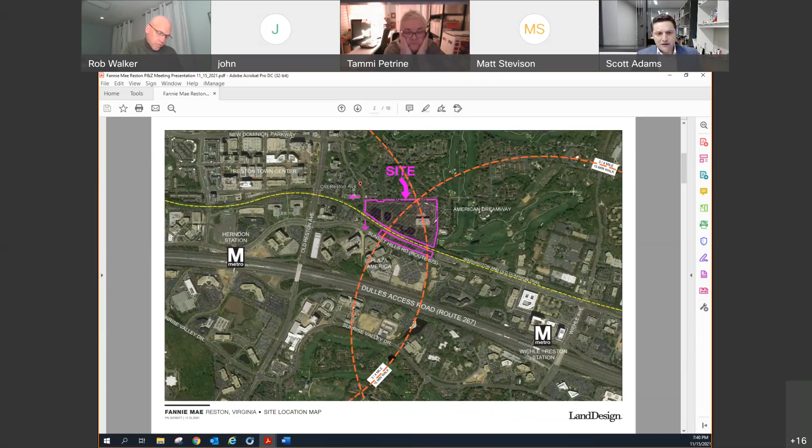The site is the old Fannie Mae property, a little over 28 acres north of Sunset Hills Road, east of Old Reston, about three-quarters of a mile from both the Wiehle-Reston Metro station and the Herndon station. The southern portion is bisected by the W&OD Trail, leaving a small sliver between the W&OD and Sunset Hills. The site is currently zoned PDC per zoning approval from the early 90s, which allowed development of 850,000 square feet of office at a 0.62 FAR, consisting of 3 office buildings. The site is currently developed with one of those buildings, with 2 unbuilt but approved office buildings totaling about 450,000 square feet of additional density.

What we're planning for this project is to utilize one of the comprehensive plan options for redevelopment of the site, which is for planned mixed use up to a 0.5 FAR. So we're retaining the existing office building, but coming in at a lower density with some residential compared to what's currently approved.

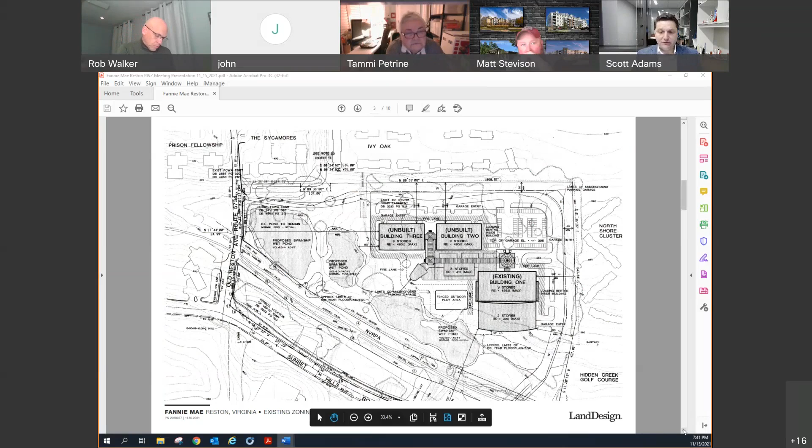Back in December, we presented a residential layout with for-sale townhomes. That layout included reshaping some of the existing ponds on the site, building public amenities south of the W&OD Trail, but with really limited public access to the site overall, plus a couple of new parking areas. There were questions raised about the design, the layout, and how land-consumptive it was, along with a desire to protect existing tree save areas and previously approved open space, and a push to make the site more publicly accessible. We also heard dislike of the new parking areas.

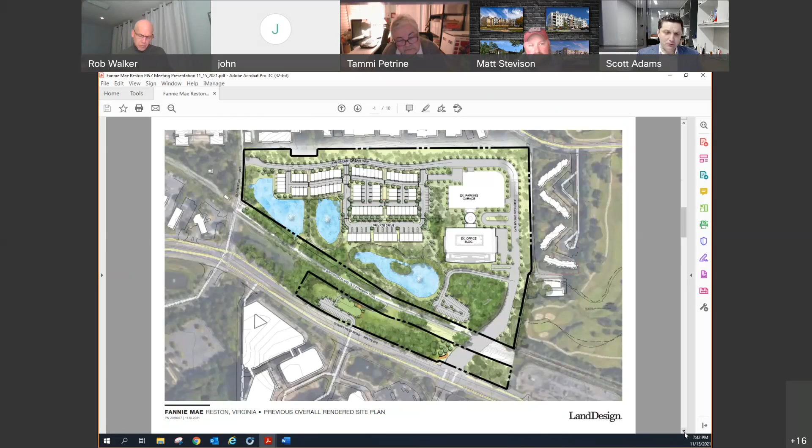The new plan we've been working on for almost the past year still calls for residential townhouses at a 0.5 FAR, a reduction of 0.12 FAR from what's currently approved, and maintains a lot of the commitments we discussed last time in terms of green building certification, the commitment to providing both ADUs and WDUs, and other standard commitments typical in townhouse projects.

But we've made a number of fairly significant positive changes to the project to respond to comments from the committee. First and foremost, we've shifted and tightened up the design so we have a much more compact layout with the townhouses, taking up less land with buildings and roads.

This has allowed us to avoid encroaching into any of the existing ponds, which will stay as currently developed on the site. There's EQC around those ponds, and we've kept all development outside of those EQC limits. The only limited work within the EQC right now relates to repairing and upgrading existing trails in those areas, and adding some new publicly accessible trails and other improvements for public use of that open space.

We're also making significant enhancements to the ponds to make them more sustainable, particularly Pond A, on the western side of the property, the left-hand side of the image, which is currently very shallow and slowly filling in. We're working to make that pond more sustainable long-term and more ecologically sound. Additionally, we're adding 30,000 square feet of EQC on the property, primarily in the lower right-hand side of the screen, north of the W&OD Trail.

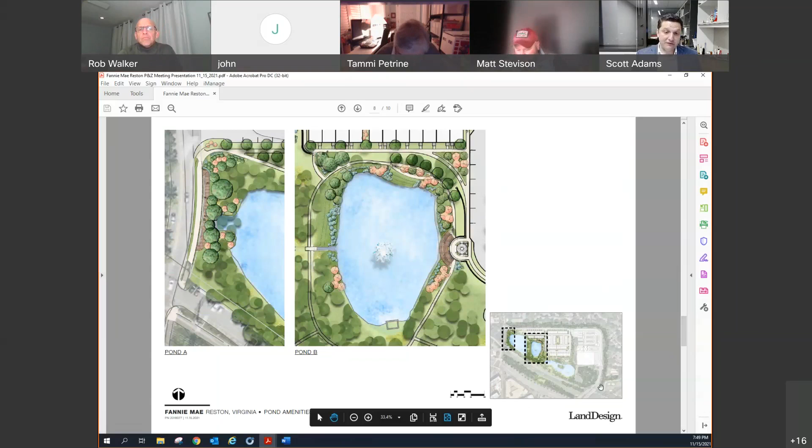From a transportation standpoint, we've continued to improve the transportation commitments as part of this project, mainly focused on multimodal transportation options. As you may recall, the residential option creates a significant trip reduction from the approved office use. For the AM peak, trips are reduced from 355 down to 45, and in the PM peak, from 376 down to 56 trips.

Additionally, moving with the theme of opening the site up more, currently American Dream Way is gated at both ends, and on Old Reston, that gate is right near the entrance to American Dream Way.

We've taken those gates and moved them back within the property so that they're only located directly adjacent to the office building. We've retained those gates mainly because we're marketing the site for secure tenants, and that's a requirement for those tenants to come into the property. But we've really tried to make sure that the entirety of the residential area is open with free access for both vehicles and pedestrians coming into the site.

Within the site, we've also improved the pedestrian connections, including the trail network, but also new sidewalks running throughout, ensuring that we've got offsite connections that allow us to be integrated into the overall Reston community. We've also committed to a number of frontage improvements along Sunset Hills. Along the entrance of American Dream Way at Sunset Hills, that's a very wide entrance right now, and we've agreed to restripe that and reduce the width of that pedestrian crossing to create a better pedestrian environment.

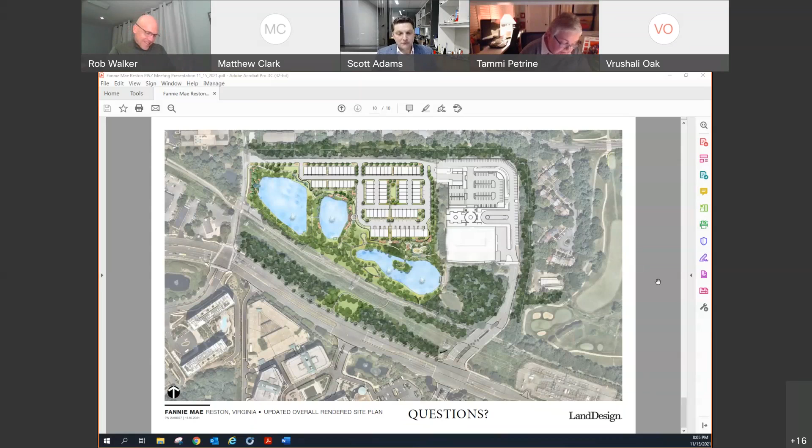Thanks, Rob. I'm glad everybody was short so I can be long. I've been looking at this. I'm in shock that there's no dog park when it's in our documents that we're supposed to be reviewing.

Why did you go from 90 units, showing 87 on your drawing, but your documents say 87 to 95? What's going on there? How is that? What is that discrepancy? It's to leave flexibility on the ultimate width of the units. Right now we're showing just a standardized unit width, but there will be variation in that as we move towards the final design, and that's where that range comes in.

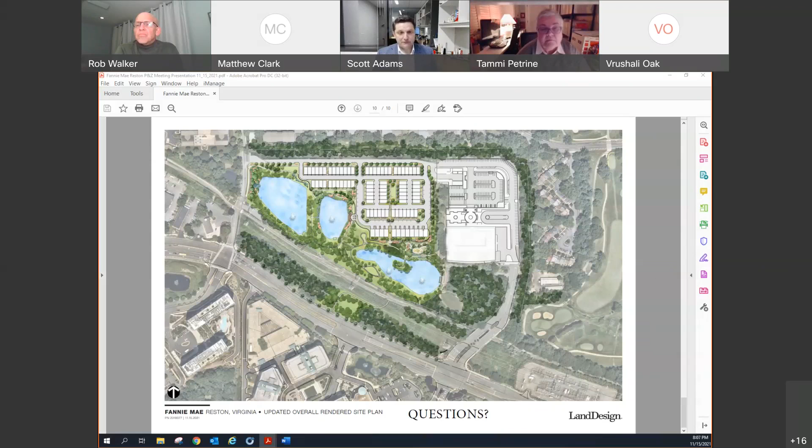Well, that's my next question. What are your width ranges, how many bedrooms, what sizes are these, and what price points? A lot of those questions depend on who the ultimate builder is for the project, in terms of the mix of number of bedrooms for each unit, and the overall mix of the final width for each of these townhouses.

I don't know, Steve, if you have any additional information. Yeah, I can weigh in on part of it. Tammi, the units, if you see the pond that's farthest to the right, those units there are 24 feet wide. And the rest of the units that you see right there are 20 feet wide.

And this plan right here, the range that Scott alluded to, because we're looking at the footprint right here. The footprint obviously won't change. The range would be 87 to 92, so it's not 95.

In terms of size, I think the builder wants to retain some optionality on whether something is 3 bedrooms or 4 bedrooms. So I kind of leave that part up to the builder, and when someone buys a house, they can choose. In terms of size, I would guess, and this is Steve guessing, the 20-foot wide units are going to be probably 2,000 to 2,200 square feet, and the larger units at the bottom would be larger, around 2,400 to 2,600 plus or minus.

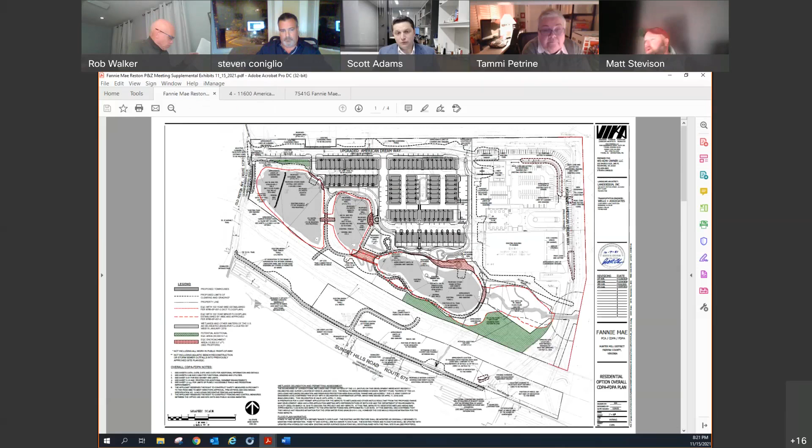There's a little bit of history with the EQC design on the site, where when the original rezoning was approved back in the early 90s, the ponds shown on that rezoning plan had a different configuration. When the site was actually built, the approved site plan shows the pond configuration that's there now. So the EQC level from the zoning plan is tied to the water surface level for those ponds. When the pond design changed, the EQC boundaries adjusted to the water surface level that was actually constructed, which means there's actually more EQC developed than what was shown on the zoning plans originally. So what we've got up here in red is the current EQC boundary for the project.

Okay, but where's the floodplain? I saw somewhere, I went on to another map, but I saw flood area right above Pond B, bordering on Pond A. I don't know the topography. We didn't get a topo map, but I assume it's higher. I don't know, I mean, I definitely saw floodplain.

And you talk about minor floodplain on your site. What I'm trying to caution you is if it's a minor floodplain, it's going to be flooded given the ferocity and the duration of these intense, very frequent storms that we're getting. So I would be interested what staff thinks about that. The last thing I think they want is for any townhouses to be built that are going to flood.

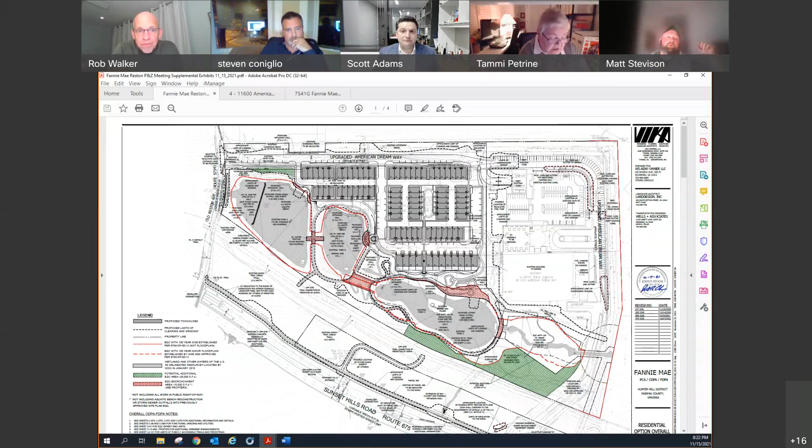Hey, can we have you wrap up your comments please? Yes, I have just a few more pages. Thank you. What, you mentioned that...

Well, first of all, has Dominion, Northern Virginia Park Authority, you're talking to them? You mentioned you had, has Dominion okayed this with their easement, the idea for the park off the W&OD?

So we have not talked to Dominion, so we would be dedicating that land area to Nova Parks, and then there are restrictions that Dominion has for any improvements that are located within their easement or within a certain distance of any of the lines that they have there. So whatever the final design of the park space is would have to respect those Dominion guidelines.

Okay, and you commented that you were going to approach RA. Is this RA for membership for the townhouses? We have... to them, sorry, go ahead. I've spoken to them, but at this point, this property is not part of RA. That's going to be a building. That is correct, that is not part of RA.

That's why I'm asking the question, because you have a statement on page 6, number 13, or I guess it's on page 7, something about RA doing maintenance. And I'm like, what? You're not even members of RA. This is not PRC. Yeah, we're not. What we have done is started having conversations with RA about the potential for the townhouse piece to become RA members, but we haven't said that these townhouses will be part of RA or that there's any maintenance obligation for RA.

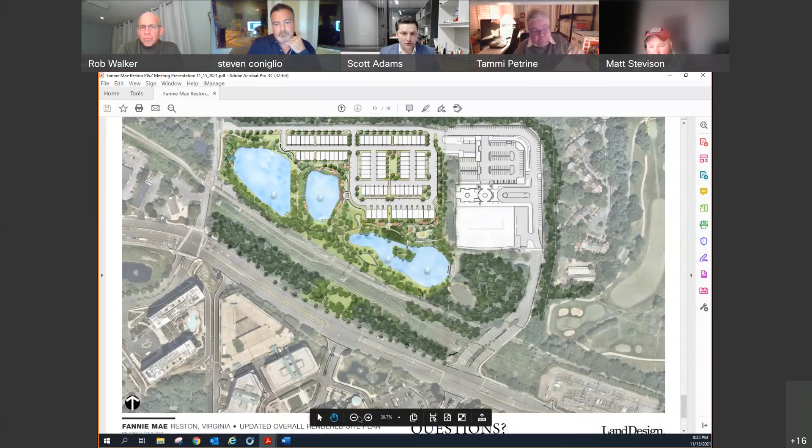Before we get off that, Scott, maybe you could tell them who we've reached out to. Sure. So we reached out to the properties that are directly adjacent to us to the north: Ivy Oak, North Shore, and the Sycamore Apartments. I see in the chat that there are folks from Charter Oak, and we're absolutely happy to reach out and invite them to the December 1st community meeting, and any other clusters that want to participate in that.

All right, can we move on to Matt?

Thank you. Yeah, I just wanted to commend the development team on the improvements they've made to the site. From the last time I looked at this, I know there were concerns I had about access points and the community open space, and I think this is a huge improvement over what I saw previously. I'll also add, as far as layouts on a site and the size of the houses and units, this feels appropriate to me for the context of the site, the density around there.

I think the parking meets the required parking count. I don't have concerns about the parking numbers. And I think the general widths you gave of 20 and 24 feet are very standardized widths that I've done all over Fairfax County in areas I'd consider comparable to this site. So I don't have any major questions. You actually answered some of the questions I had about the architecture, as far as how tall the buildings were going to be, whether they're going to have roof decks. I saw some example images in the packet, and they had that, but they were just example images.

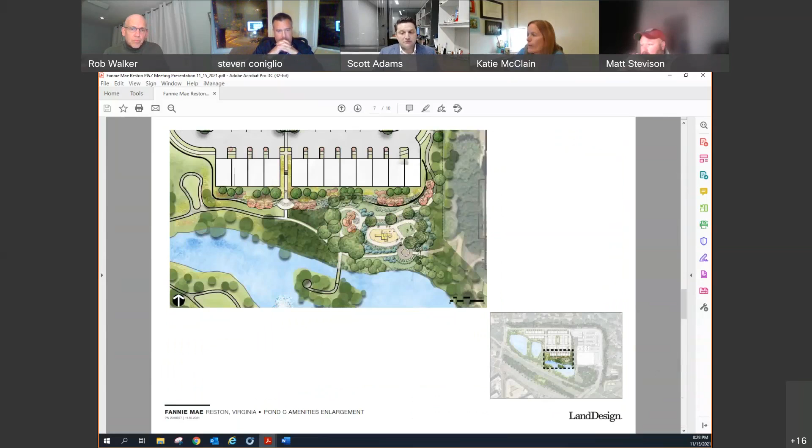So I know you said there's no more dog park. Is there still going to be a tot lot or family park up there near the townhomes? There is, right above Pond C. There's a playground planned, and also seating areas and an open grass play area. And then where the parking lot was going to be, that large parking lot that's no longer happening, just south of the office building, is that just going to be forever green space? Is there any plan in the future to make it a parking lot or another building, or will that just stay green space how it is? Yep, exactly how it's shown.

Okay, I like that. And so if I wanted to come over to this area and walk these trails around these three ponds, where would I park? So there are a couple of options. One is there's an existing parking lot that's the trailhead for the W&OD Trail right off of Old Reston, just north of here, that's a parking lot Nova Parks has. Other than that, we envision people primarily walking to the trail network and utilizing it, unless they're parking in that public parking lot. That's it, great, it looks really good.

Thanks. Thanks, Katie. And then Michelle.

Sorry. Okay, I just have a few follow-up questions from some of what was already asked, if I can.

Just to confirm, the area that was a parking lot and is now green space—can you confirm that will not become a parking lot or anything else? Is that proffered? Correct. Yeah, it's shown on the development plan as green space, so there's no development that can occur there, even if we wanted to, which we don't.

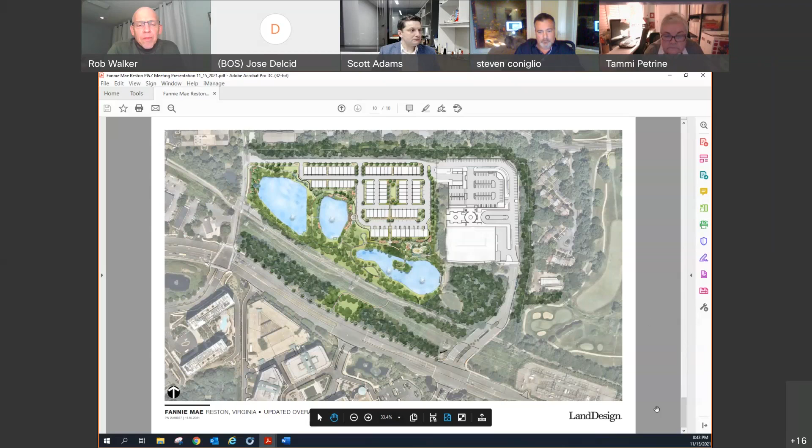Michelle? Great. Hi, good evening. Thank you very much. So I had some comments, and I guess a couple questions.

I'm not sure if this first question is rhetorical or not, but I live in the North Shore Cluster Association, which is to the right of the Fannie Mae building. I've lived here for 20 years in Reston, and I love Reston. I moved here because it was green. It's not becoming so green anymore, in my opinion, with all these buildings going up. But I'm curious why there's going to be a vote tonight, if I'm understanding this correctly, when the community has not been involved. I've not been to a community meeting, I hear there's one on December 1st. I don't know if Steve and Scott remember me — I know my video's not up, but I met with you a year and a half ago about the other place you're trying to build on Hidden Creek, and pointed out clearly that I was the POC for North Shore Association. So this is the first meeting I've been to about it. I would prefer there not be a vote tonight until the community has had an opportunity to discuss this.

Just to be clear, because we're definitely not looking for a vote tonight. Just to clarify that. Thank you very much. I appreciate that — couple comments, I guess.

There is public access to this today. There's a gate open from dawn till dusk on the North Shore side, and people access it from the W&OD Trail today. That's more a comment because I live there — I walk these trails, I walk those ponds. And the ponds right now, I guess somebody was saying, Scott, that may have been you, that the Fannie Mae Building Association is supposed to take care of those ponds. Assuming this actually goes forward, which I kind of hope it doesn't, they're not well cared for. I personally take garbage bags over there and clean those ponds up. So that's another comment.

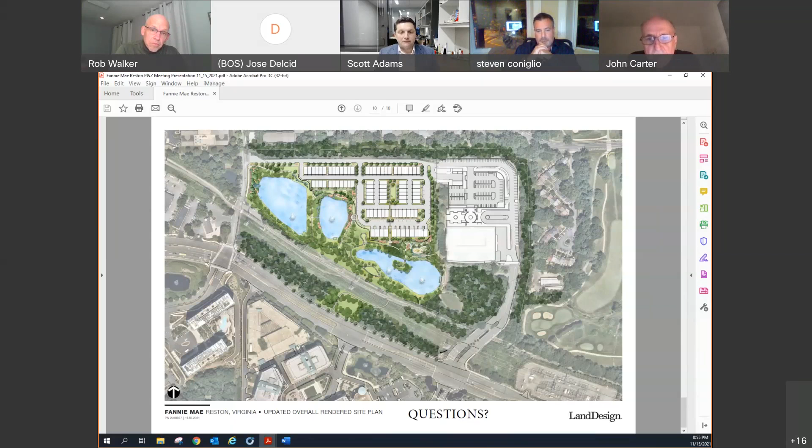And then a small point, the sidewalk—we've talked about this before—it seems to me on the wrong side of American Dream Way. I'm not sure why it's over there. Seems like it should be on the west side rather than the east side. That would get people better down to Sunset Hills.

What else? And Commissioner Carter... Yes, I think the reason that was set up that way is that's where the crosswalk is across Sunset Hills, on the eastern side of the Greenway. I see. And so it goes from sort of the southern side, and then as you curve around, we've got a crosswalk to get across to that side, which connects you to the crosswalk across Sunset Hills. I'm surprised the crosswalk isn't on the other side, but anyway.

So yeah, along with those design points, a small detail is I would show the parking for the trail users and the bike area, and then Michelle's notion about the school buses. And last but not least, just a little bit more room—I would get out of the EQC altogether. You've got two or three encroachments of a minor way, and I think a little bit more time could get you out of that, and we wouldn't have that discussion.

And then I think that this park is one of the most glorious parks in Reston today. It may not have much public access, but it certainly is a very glorious park. And then combined with the future Nova Park, even if that remained largely as forest, I think is pretty glamorous for Reston. So anyway, enough of me. Thank you, John.

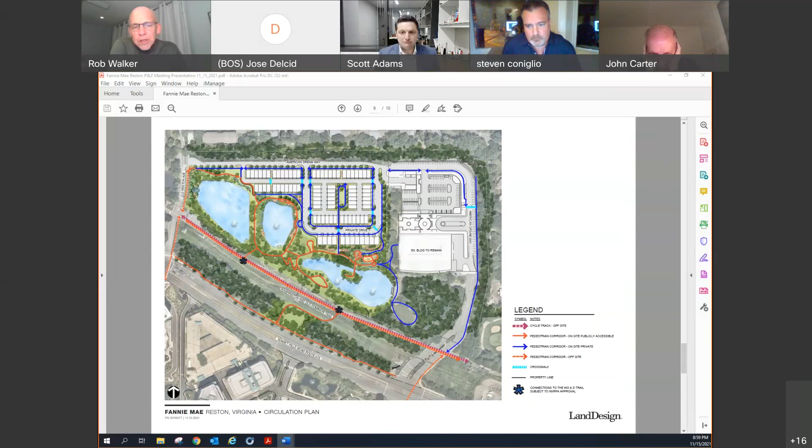Okay, Scott, we started thinking we might be looking for a vote tonight, but you've kind of backed off after hearing some of the public comments. You've heard a lot tonight—a lot of good things about what this development is doing, and some things that need a relook. My biggest concern is hearing that some of the nearby community felt they hadn't been spoken to or reached out to, and that's become critical here in Reston. I'm glad to hear there's a meeting coming up, but

It sounds like we'll have to schedule you to come back at a later date. Yep, understood. All right, I don't have any other parting words. Thank you for your time. Thank you very much, and I look forward to coming back here soon. Michelle, I'll get on those lights—sorry for that.

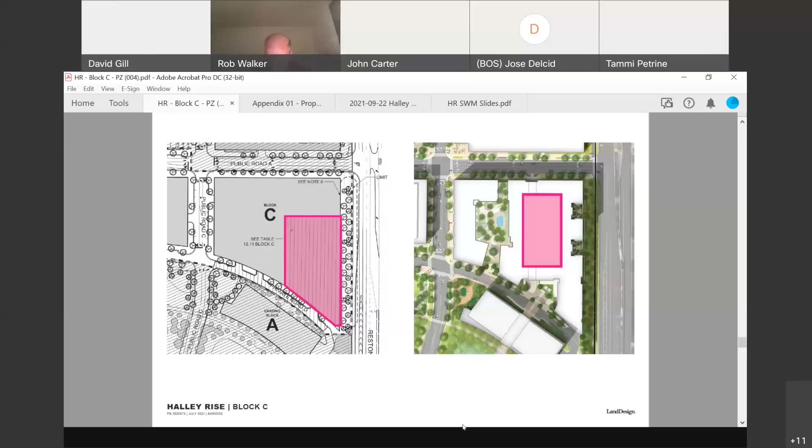Just as a reminder to everybody, let me go ahead and start sharing the screen here. So this is the project we were talking about. On the left is what was approved in Halley Rise as part of the CDP, and on the right is the FDP we've been discussing. For everyone's edification of where this is in the world, I'll page down one more.

This is the overall Halley Rise development. Reston Parkway would be along the east, just to the north is where the toll road is, and Sunrise Valley is on the south side. USGS would be just down the road here. The block we're talking about is called Block C, which is this block—it is two residential towers surrounding the parking garage.

I'm happy to go back through the pictures I've shown before of the different facades, but those haven't changed since the last time we talked. There were a couple of questions raised that I wanted to make sure get answered. One was from Michelle regarding the school pyramid here—we went back and looked, and this is in the South Lakes pyramid. The elementary school would be Dogwood.

Then they would go to Langston Hughes and to South Lakes. In addition, for the particular spot where the school bus might line up, it is exactly what Scott Adams said. When we get to the site plan, we coordinate with Fairfax County Public Schools on where that location would be. It would likely be a unified spot here on Road C, our north-south road.

Our lobby entrance for this building and the other building is basically in this location along the first floor. It reaches to the corner and all the way over to here for this building. So they would likely come out here and be parked along here for that particular access.

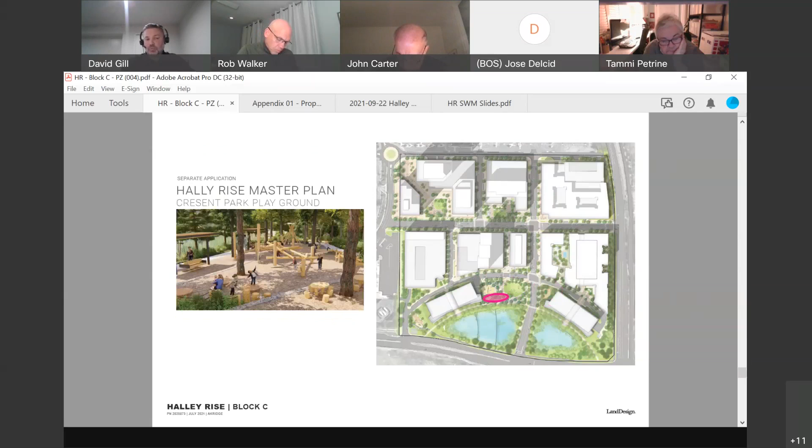In addition, we have the Central Crescent Park, and that comes online — I think as a different block, not ours — and will be coming online soon. There's a large central lawn, a specialized play area with hopefully some unique play structures, and then a large, more active rec area for older kids and adults, reflecting a volleyball court.

And then this is the dog park on the far side of the project. This has actually been constructed as well and can actually be used right now by the public.

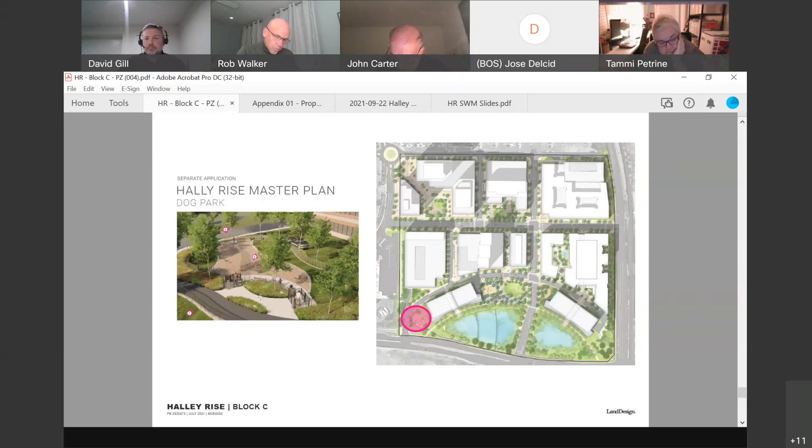The other question was in relation to stormwater. When it came through, it was looked at for the site overall, and we didn't have any control over that particular proffer. But my understanding, in working with Pete Crawford and with Mark Looney at Cooley, who held the original entitlement for the overall project, is that both these ponds are now being amenitized and opened up to the public, with programming around each of the ponds.

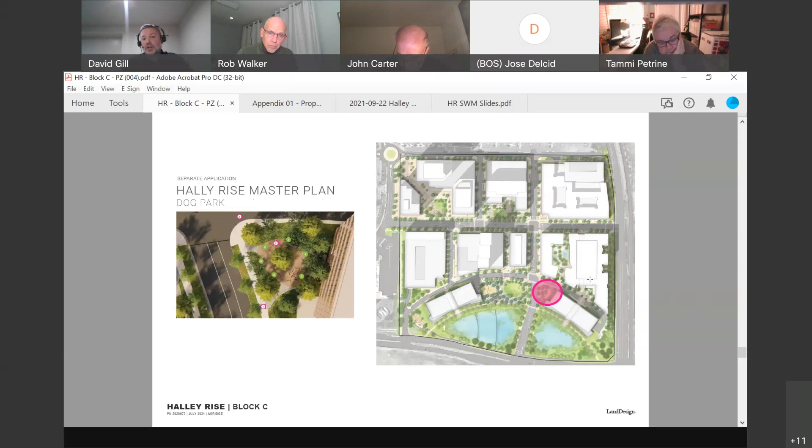The reduction in phosphorus and in the rate is a 40% improvement over the requirements for this particular application. In addition, we've also done additional impervious area work compared to the approved CDP. The original approvals on stormwater were based on this block and its imperviousness, and we have these courtyard cutouts here and here to help improve that.

In addition, we've also committed to a green roof here — that will be 35% green roof on this location. You have to back out some area for walkways and around the pool, but when we did the math, it comes out to about 35%, and that's reflected in our development conditions.

Other than that, we're very excited about bringing this project forward and really excited about the opportunity to be in Reston. With that, we're happy to answer any questions before we go further, because I want to make sure I get everything answered for everyone here tonight.

Thanks, David. So again, if I understand correctly, you have a planning commission date of December 8th that you think is going to hold, and you are looking for a vote from us tonight.

So let's go on to committee comments. I'm going to go in backward order. Michelle, I'm going to start with you, if that's okay. Sure, hi.

I don't have any specific questions, other than it would be good to see the staff report. Agreed, and I'm happy to forward that to people as soon as it's available — on the 23rd, that's when Katie said she would be able to get it completed. She anticipates it'll be an improvement.

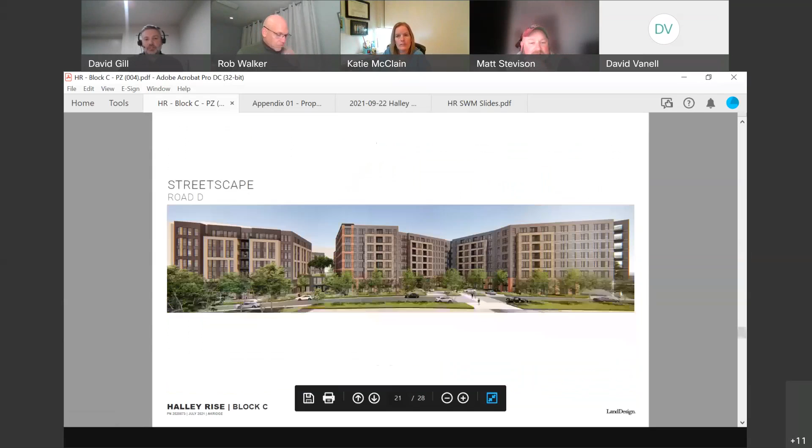It's kind of hard to see on this drawing what's going on there. I have more details of that, Matt, if you want to go into it from the prior two presentations. I remember seeing it before, but maybe you could show a drawing available so we could take a look at it. Yeah, so this is the Road D architecture, the south side of the block, getting into the pedestrian streetscape or turnaround. In this picture, to the left would be the office building, and this would be the main entrance to our park.

I don't have any major concerns, I just wanted to call attention to that. The trees are important, but the planter boxes, pavers, benches, and street furniture are also part of this fabric, and they all need to work together. But I think this is really coming together well right now.

We actually do have a larger gutter pan here to allow folks to get out when they're parking. You can see it here where she's getting out. I know there's been concerns, even at the planning commission level, that some of our tree pits get depressed off the curb, so you end up stepping into a pit. Is that why you were looking to do that, like bioswales? Well, no, we weren't looking to do that. I think there's been concerns sometimes in the planning commissions about that issue in these urban frameworks, and we paid special attention to make sure that where we're activating the street with parallel parking, they can actually get out.

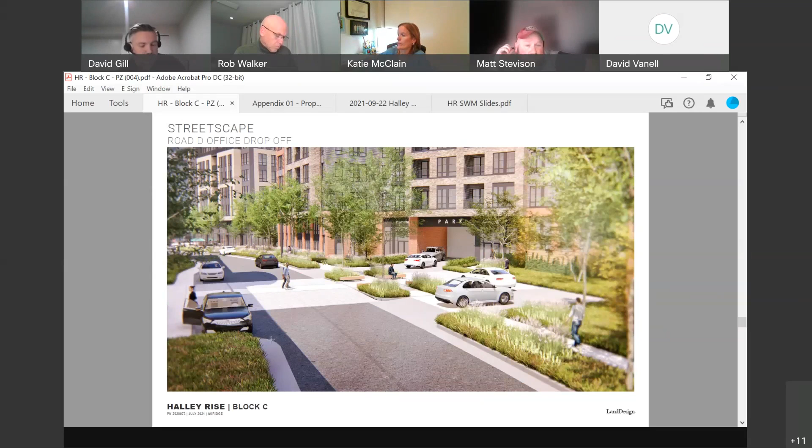Well, I like it. I don't have any other questions. All right, thanks, Matt. Tammy. Thank you, I have a couple concerns.

The building, Tower A, is to the right, correct? And Tower B is the left, which is the Texas Donut. Is that correct? Correct. Okay.

So the terrace that surrounds the hollow of the C for Tower A, that is on the sheet. Whoever wrote this, the county planner looking at this, is talking about the pool service area. We talked about this before, and you said it's not a swimming pool, but a water feature. Is that correct? Yes, that's my understanding. So it's going to be a water feature rather than a traditional pool. Jay, correct me if I'm saying that wrong.

No, David, Tammy, the plan now is to be flexible with that. The idea is that it's primarily looked at as a water feature. The area is relatively constrained. We do have schematics where we could put in a pool equipment room, the required indoor access through the bath facilities to the deck area. We just haven't made a decision on what's going to happen there. But this shows the... I'm sorry, go ahead. No, go ahead. I'm interested in what you're planning there.

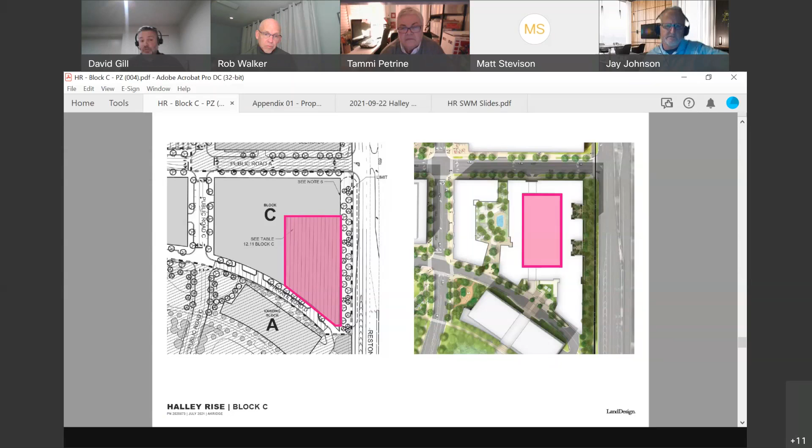We very likely will be putting those buildings in first, and because the building on the right is what's being delivered first, most of those units, if not all, will be in that building, very likely, when we do deliver it.

I have a huge problem with that - they're supposed to be equally distributed between the whole project. And I don't know what your proffer says, but I thought the new rates as of February 20th were 60, 70, and 80% AMI. Correct, and that is what the new policy says for new rezonings. Under that new policy, you only have to do 8% of your units. I understand that. Right, so I think when this was negotiated with Mark - and I'm speaking for him, he's not on this call - part of the discussion with Commissioner Carter was doing more units than you would typically get, which was 12%. We're getting 15%, and with the lower tier at the time, which was that 100 tier.

Well, if you're doing 15% and you have 100% AMI, we're not helping the people that need the help. So that would be the point. Those 100 and 120 AMIs were always ludicrous. So I don't care what Mark negotiated, that's not helpful. But we're an equity, diverse community, and we split our units equally. So this idea that they're all going to be on one side and the other side is going to be more luxurious and have this open courtyard and maybe a pool.

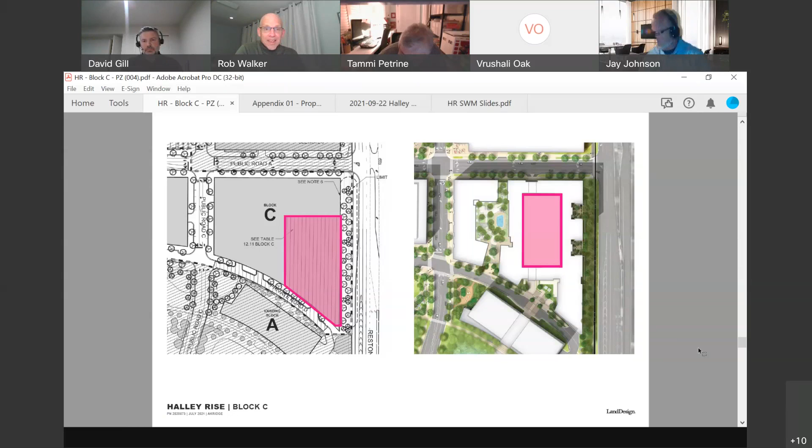I don't have any questions. Things look good, nothing additional beyond what's already been asked.